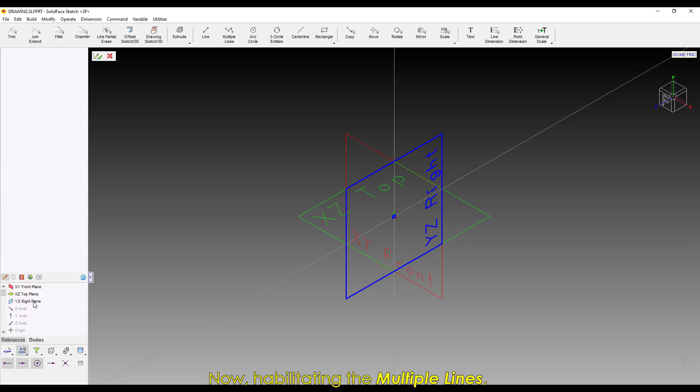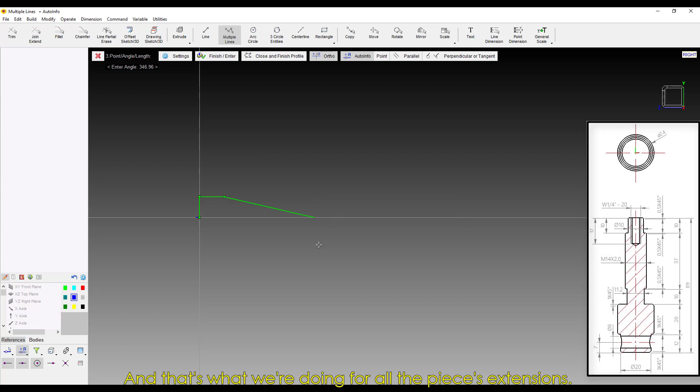Continuing our press pieces, let's model the spindle. Starting with a new part, we're activating the YZ plane, then habilitating multiple lines and going to the origin point. Since we'll use the revolve command later, we're only drawing half of our geometry on the sketch. Don't worry about the chamfers now; we'll draw them later once the piece has a solid body. On the y-axis we're inputting 10, and on the x-axis it'll be 12, and that's what we're doing for all the piece's extensions. At the end, we'll close the geometry and confirm the dimensions.

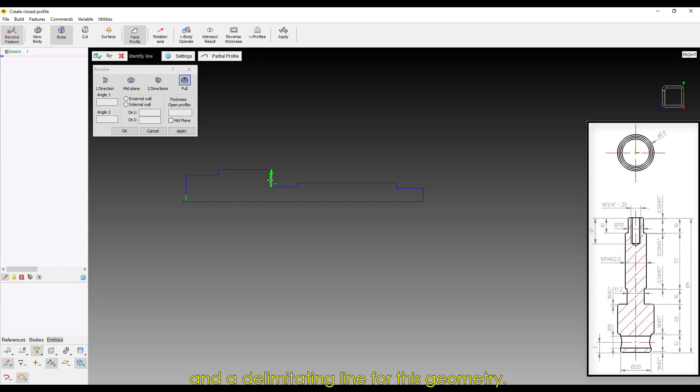After finishing the sketch and removing the measures' visibility, we're habilitating the revolve command. With the command active, we're selecting the axis of rotation and a delimiting line for this geometry. Select OK and finish the operation.

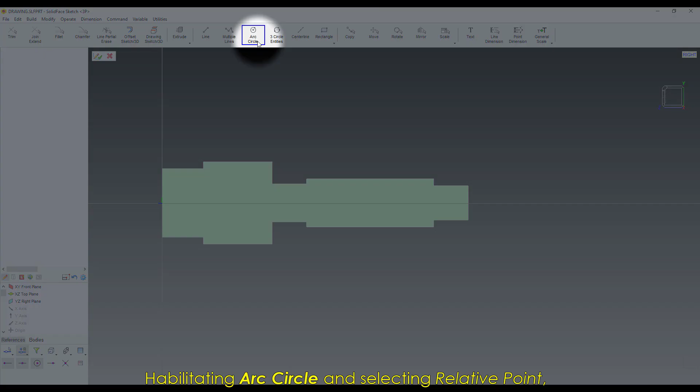Now we're moving on to the piece's hole, where the handle will be docked when we assemble the press. For this, we're activating the YZ plane and habilitating Create Sketch Section to visualize and draw this part of the piece. Habilitating Arc Circle and selecting Relative Point, we use the superior or inferior corner as reference, and add a circle with any measure in distance. Then we input the distance from the reference point to the center of this circle on the x-axis, which will be 7, on the y-axis a distance of 10, and a radius of 4.

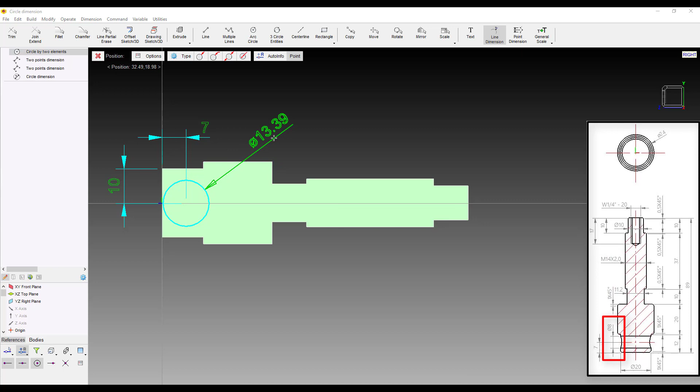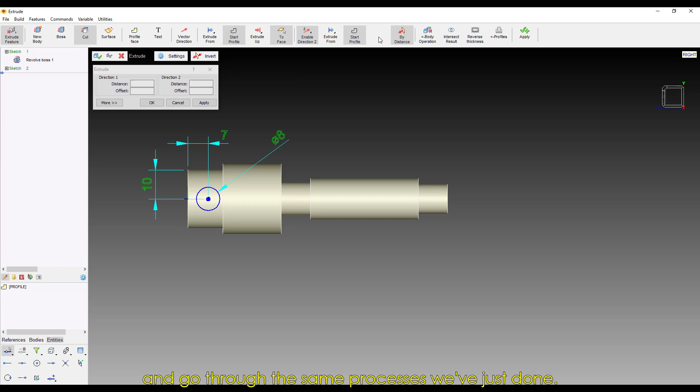With the sketch still active, we're habilitating Extrude to make the hole. We select Cut, then Extrude Up, activate the option Face, Surface, and Plane, and select where we're adding the hole. Habilitate the option Enable Direction 2, and go through the same processes we've just done. Click OK and finish the operation. Now our hole is made.

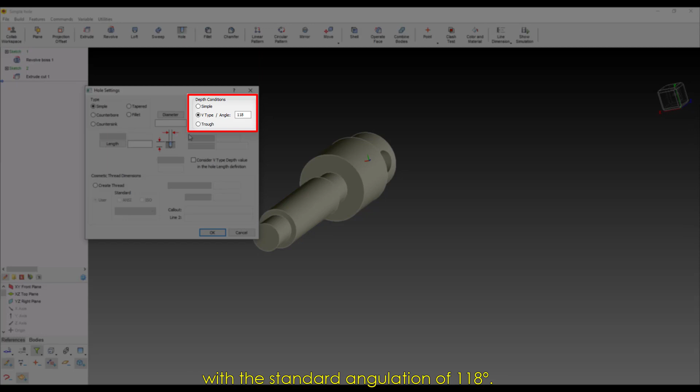Now we're drawing the threaded hole that will be in the front of the spindle. Let's habilitate the Hole command. On Type, we're keeping Simple selected, and habilitating the V-type angle with the standard angulation of 118 degrees. Then we activate the option for Thread Creation using the ANSI standard, and select the format 1/4 inch to 20 UNC, adding 17 as the hole's depth. After defining the shape of the hole, we select OK.

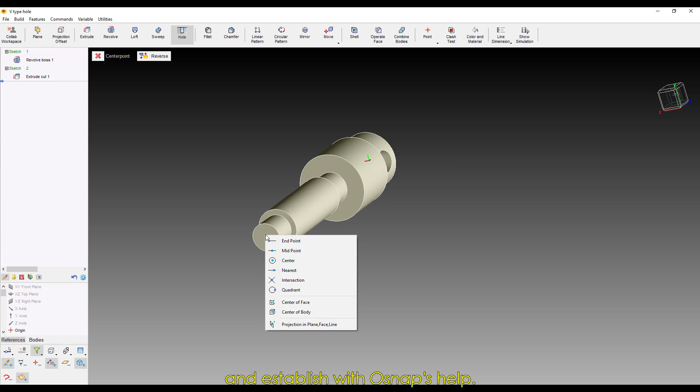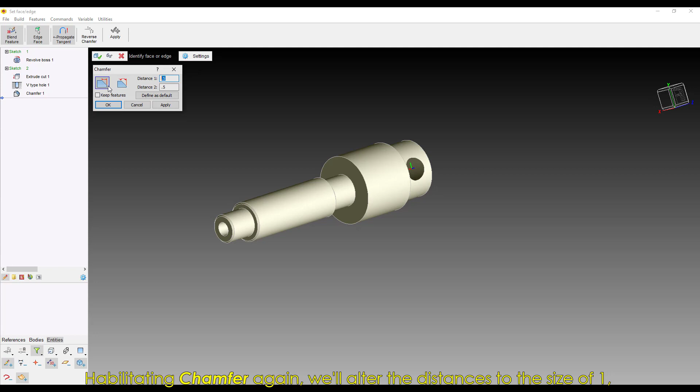We'll also determine the face where the hole will be made and establish it with OSNAP's help. Now we're moving on to the chamfer. Habilitating chamfer, we add both distances with a measure of 0.5, then select the edges they'll be on. Since we'll have 3 chamfers with those measures, I'll select those 3 edges, select OK, and finish the operation. Habilitating chamfer again, we alter the distances to a size of 1, select the edges, and finish the command. To finish our piece, we'll go to Color and Material and alter it to Carbon Steel.

And there you go, our spindle is finished.